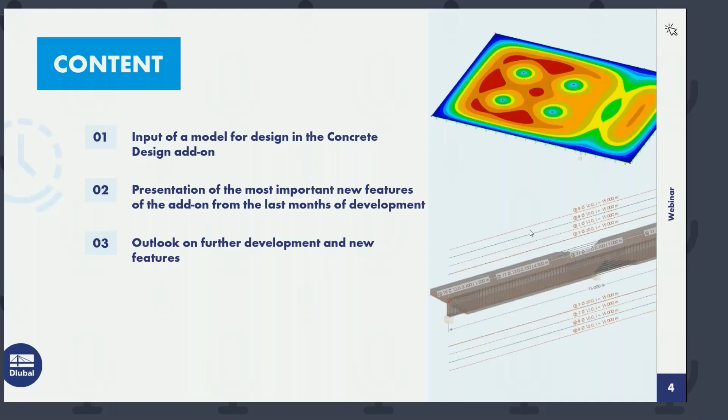Okay, thanks Andreas for the introduction. I will start with a short overview about the content of today's presentation. As I already mentioned, I will show you new features in our concrete design add-on. I will create a small structure in RFEM 6, and during the modeling process, I will tell you about all the new features we now have in our concrete design add-on. Here's a short overview of these new features.

Mainly it's the automatic function for surface reinforcement. Then we have a new function regarding determination of required reinforcement for members, which now also includes the serviceability limit state design. I will show you how to design with member representatives. We also have a new multi-edit option in the edit member dialog for members and member sets. If we have entered a reinforcement and have a certain reinforcement layout inside our member, we now have a new function for printing graphics of this reinforcement template or proposal into the printout report. I will show this to you as well. And I will show you how to activate the design check for the shear joint in the add-on.

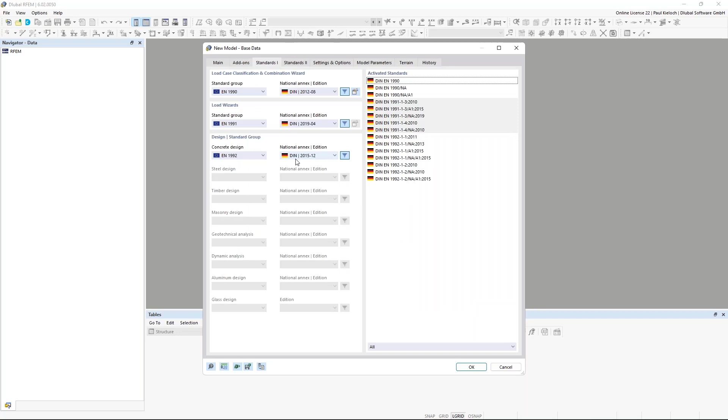As I mentioned before, I will start with creating a new model. I'm opening a new model file, and what I would like to do today is start with a template. That has the benefit that there are some settings already stored in the template, and add-ons can be activated, or I could predefine some national annexes and so on. This is already set in this template, and I'll give it the name webinar, English, so that's the English one. And I'll start this file here.

As mentioned, due to the fact that I've used these templates, I have a certain amount of materials, sections, thicknesses and so on, and I will use them today for this presentation.

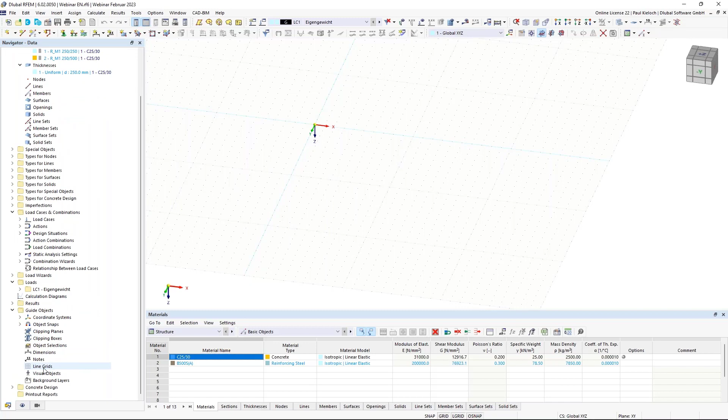So first, I'm switching here to these guide objects, and there I will create a new line grid. I will also show you today the labels and the dimensions.

Switch over here and enter the dimensions in X direction: 5 meters and 4 spans. So it looks like this.

And in Y direction, the first span with 5 meters, then 2.5 meters and 2 spans, and the last one is again 5 meters. So this is my line grid, which I would like to use today.

It looks like this. On this line grid I will create my slab, beams, columns and so on. I can switch off the grid in the background, so it's a little cleaner if you just see the line grids.

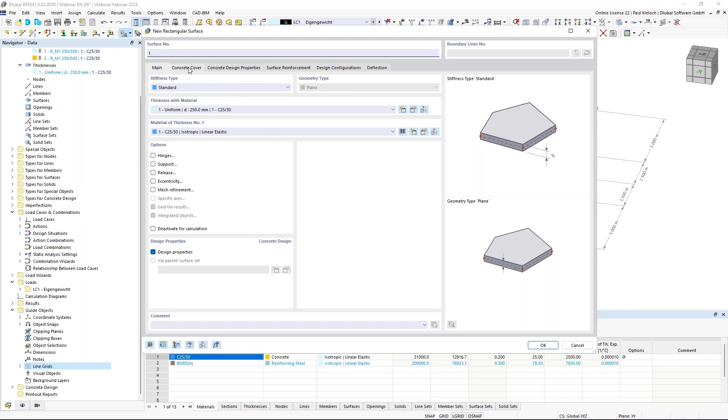The first topic is entering a surface for design. I'm creating a concrete surface with a thickness of 250 millimeters using this concrete. Before entering this surface, I can directly set the design properties for this slab. The concrete cover and the concrete durability class I leave as default in this example, XC1.

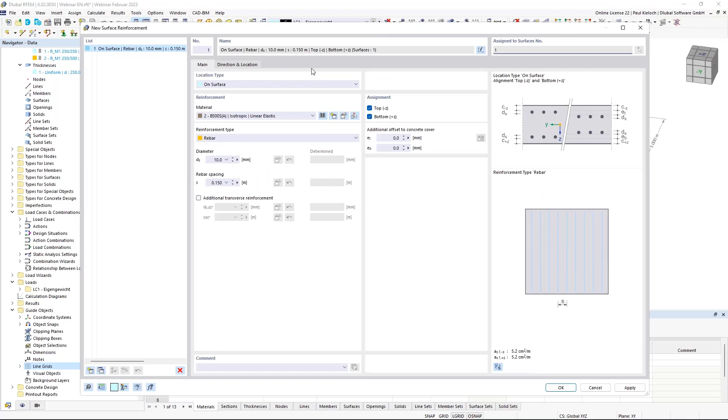The reinforcement direction is also default, and I will assign a basic reinforcement for the whole slab with a diameter of 10 millimeters and a spacing of 15 centimeters in both directions.

You see here already some changes in this dialog, and I will come back to these changes and modifications of this dialog in this latest version of RFEM 6 later, after the first calculation. Okay, I can confirm this.

The design configurations I leave also by default for this first attempt, and I will come back later to these design configurations.

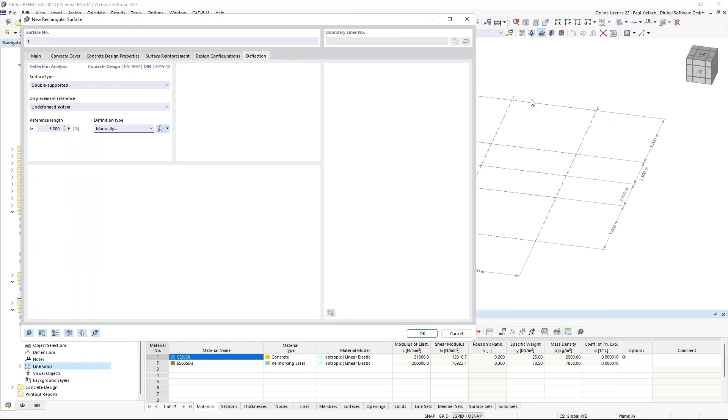The last thing I'm changing here is the reference length for the deflection analysis. So I switch this to manual, and the reference length is now set to 5 meters in X and Y direction. Confirm this, OK, and then I create my slab.

By default, you see the rendering of the assigned reinforcement mesh. And what's new now in RFEM's latest version is the description of the assigned reinforcement.

In the latest version we changed it a little bit. In previous versions there was a small arrow downwards and upwards - if the arrow was downward it was the reinforcement on the bottom side, and if upward, on the top side of the slab. Now it's just a small line next to the text on the downside or upper side. So it's a small change.

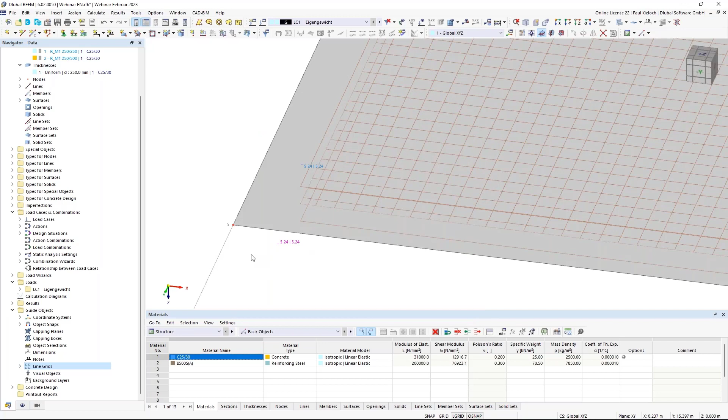What I would like to change here is the number of decimal places for this example. Now I'm switching off this reinforcement display just to have a cleaner look at the structure.

The next topic is that I would like to enter a beam, or rib member, in this axis D. I create a new member, switch the type to rib, and assign this eccentric cross-section on the positive Z side of the surface - that's the default setting. The section used should be this 250 by 500 millimeter section. I can confirm that.

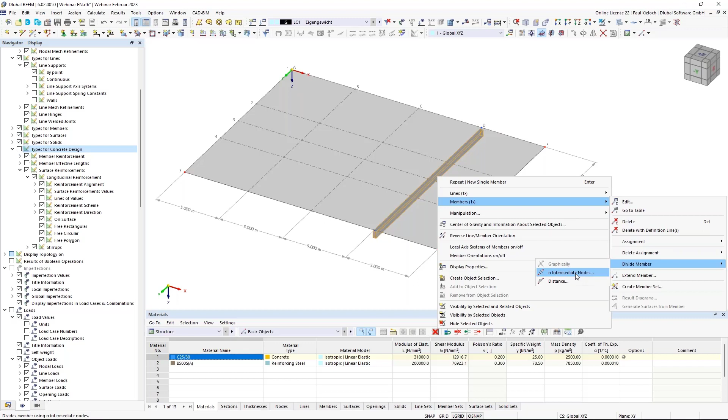Then I will assign this rib in this axis. And in this axis 3, in the point in the middle of the beam, I would like to support this beam with a column, so I'm dividing this member with one internal node.

But what's new in RFEM 6 is that we can use this node type 'on member', which has the benefit that our member is not divided into two parts, making it easier for definition of reinforcement and so on. So I will create a new node with the type on member, without dividing the member.

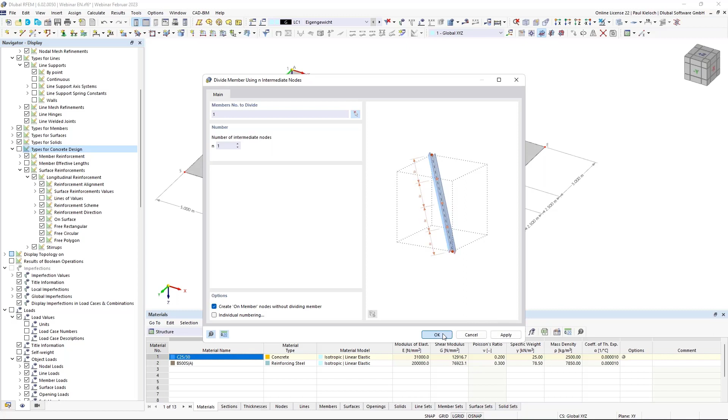You see here in the middle of the beam a light blue node, which is the new type for dividing members. The next step I would like to do is enter nodes for the column heads, so they are placed here at these points.

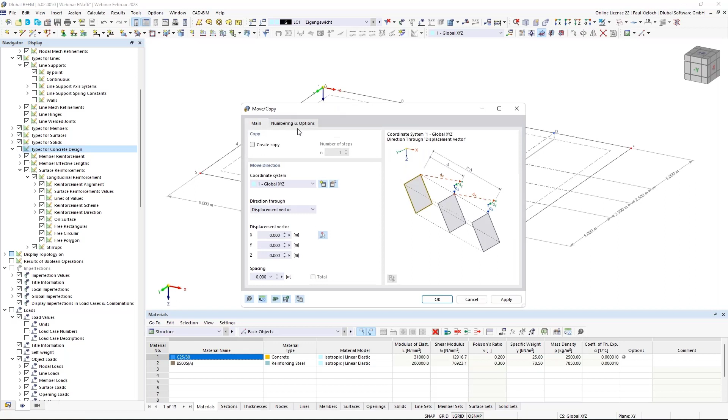Okay, now I'm switching to the wireframe display mode, and I can select these 5 nodes here, and then I will copy them with 3 meters in Z direction. I can link these steps and enter automatically a new member, so I will create a template.

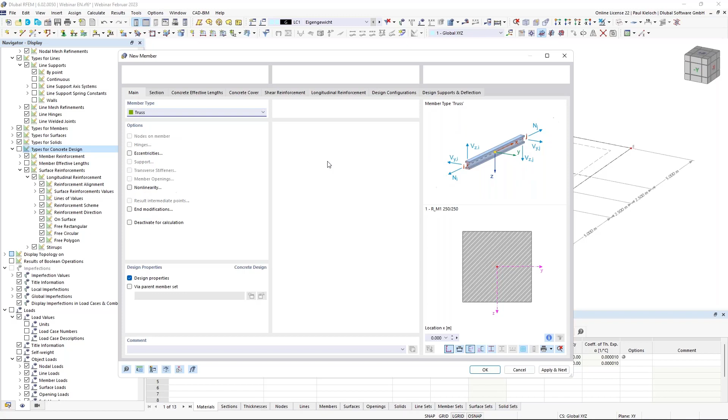The columns should be hinged at the top end and bottom end, so I'm switching the member type to truss. The section is pre-selected in this case, 250 by 250 millimeters, and I can go through all the design properties, entering the buckling lengths for the stability analysis. In my example it's a braced system, and I would like to use effective length factors of 1 in both directions.

Next step would be the concrete covering - I leave it here as it is in this example. Regarding the shear force, I would like to use shear links with a thickness or diameter of 10 millimeters and a spacing of 15 centimeters. The longitudinal reinforcement should be uniform surrounding, 4 rebars with a diameter of 20 millimeters.

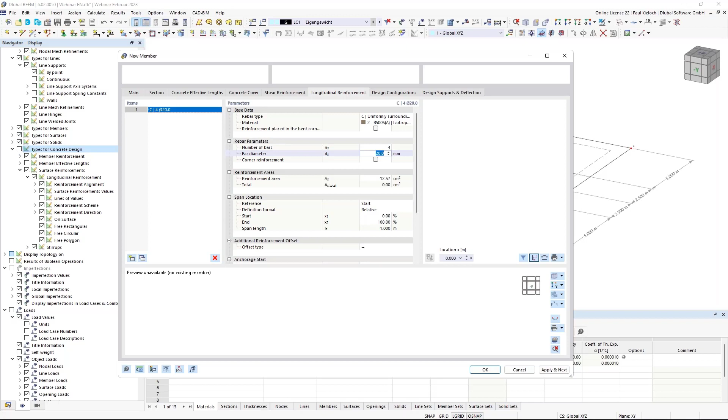Design configuration and design supports are not required to change in this case, so I can confirm this. And then I'm using the template to create my columns, and they would look like this.

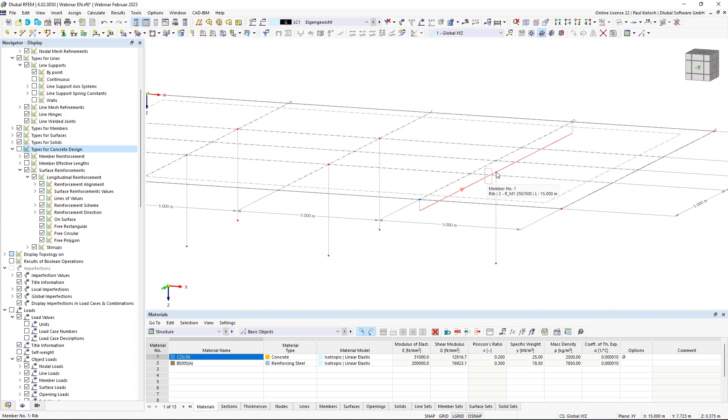I just have to take care because this node is here in the center of this eccentric beam, so the nodes at the bottom end are not at the same height. I will just do a double click on this node and switch this to 3 meters, and then we have the same level here.

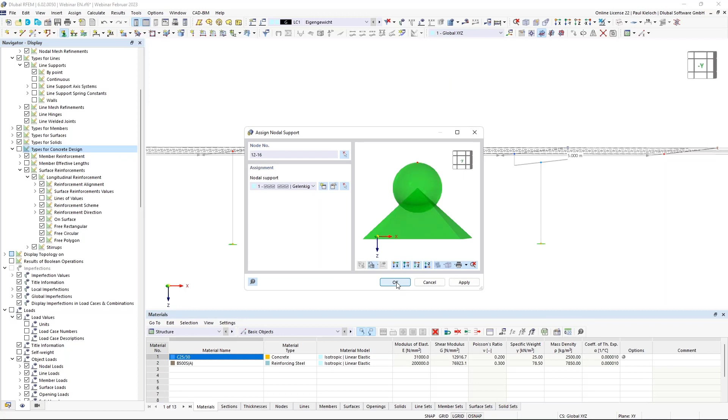Then I can create the supports for these columns, due to the fact that I have hinged member ends by this member type. I can create a new nodal support, and this is fixed or rigid in all directions. That would look like this in this example.

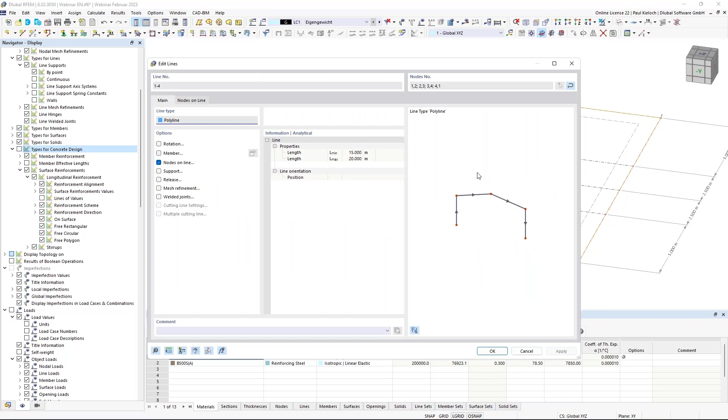Then the next topic would be entering the support at the edge of the slab, so there I would like to consider walls. We have also an option in RFEM 6 for this - I can select all the lines at the edge of the slab, opening them with a double click, and I will assign a support there, creating a new one for them, and this one will be changed to local.

As soon as I switch this to local, I'm getting a new option, stiffness via fictive wall, and the wall thickness should be 25 centimeters and a height of 3 meters, and it is hinged at the wall head and base. So that's okay for me.

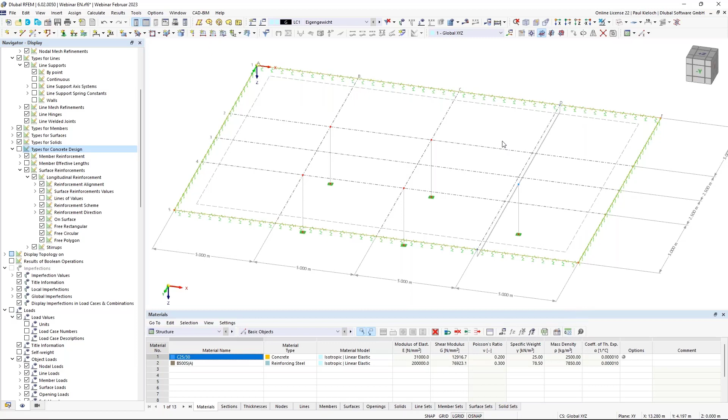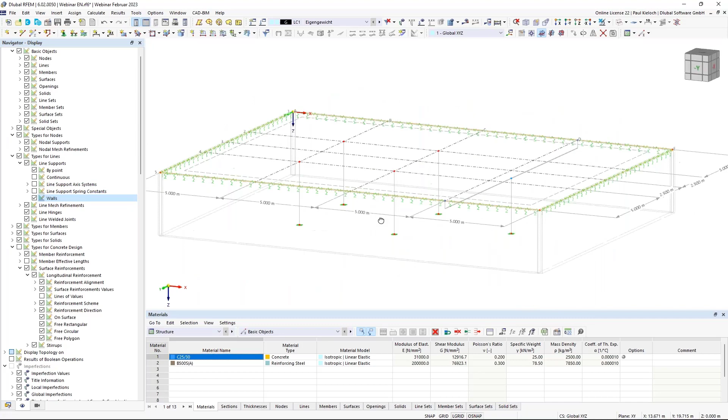I can confirm this, and then I have also the lines on the edge of the slab supported. If I would like to check this graphically in my system, I can switch to the view or display navigator, and there under line supports I have the option to activate the walls, and then I would see the system with these fictive walls here.

Okay, that is basically my system now. What I have not defined yet is the settings regarding the rib.

Therefore, I'm opening the rib member once again, and I switch to this tab here with the rib. In this table you can basically assign the segment lengths for the determination of the effective width for the ribs. I will not go too much into detail for this part - we have shown this in our first webinar regarding concrete design in November 2021, and it's also part of the Eurocode 2 training where we get more into detail regarding this table.

I will just enter the values here to have a realistic effective width for this example. I'm using this approach according to Eurocode 2, so I'm setting the segments here, user defined - it's the same on the other side.

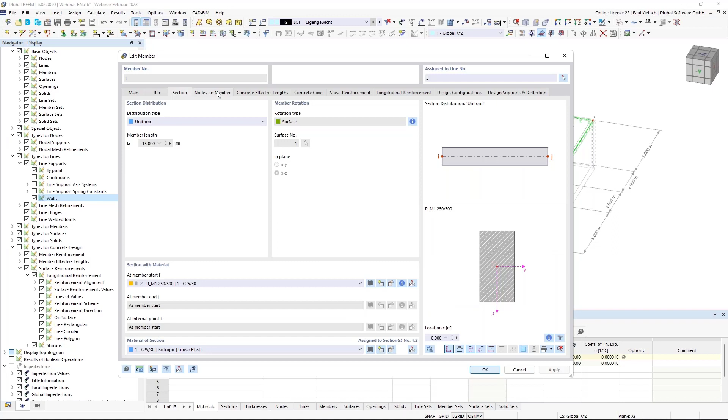So next is the section tab. There I do not have to do any changes, this is okay so far. Concrete covering also, so I can directly switch to the shear reinforcement.

I would like to use shear links, stirrups with a diameter of 10 millimeters and a spacing of 0.15 meters. And I will not use this for the whole length of the member, but I would like to have a span in the middle of the beam where I have 10 centimeter spacing between the stirrups.

So therefore I'm creating new spans. I first switch here to absolute for the definition of the span length.

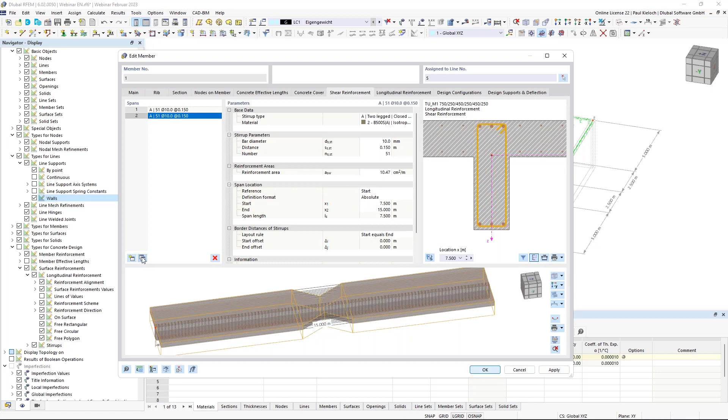Then I just click two times on this button, and then I'm getting here these spans. If I zoom in a little bit, you see that this middle span is now a little bit displaced and not in the middle of the member.

And I can change this here to 6 meters, and in the second X location to 9 meters in my example. And then the span is in the middle of the beam.

And I can change this to 0.1 meters, or 10 centimeter spacing. Okay, that's my shear reinforcement I would like to use today.

And then I'm switching to the longitudinal reinforcement. By default, the reinforcement is using here 3 rebars at the top side and on the bottom side. I will change it to 4 rebars.

And then you find also here the rebars from the surface reinforcement, which is automatically also assigned to the flanges of the rib member.

If you do not want to assign this surface reinforcement here, then you can switch it off via this button, but I will leave it on here for this example.

Last thing I would like to add here is an additional reinforcement on the sides of the web. So therefore I'm creating a new item.

You can click on this button here, and then you get a new dialog called reinforcement layout.

And in this dialog, we have a new button, a new function, and there you can print the graphic directly into, for example, a printout report, a 3D PDF, or a graphic as a file.

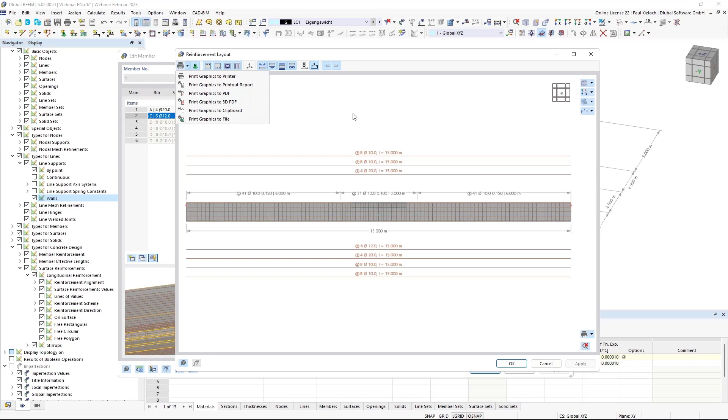So it's not a CAD file, it's a picture file. You have this option, basically the same as for printing a regular graphic into the printout report. So that's also a new feature in the add-on.

Okay, then I'm switching to the tab with the design configurations. There we have the ultimate configuration and the serviceability configuration. In both configurations, we have now new features, one new feature in every configuration.

If I'm switching to the ultimate configuration, then you can see here this shear joint, which is what I had activated before in the tab with the rib.

So in general, there is always the shear joint design check activated, and there you find further settings, for example how the program determines the shear stress in the joint.

Or you can also activate here design of flange connection on segmented cross section. So if you would like to perform these design checks, you can check it on here in this ultimate configuration.

So just keep in mind, this is always active, but you also have to take care whether you have activated the shear joint in the individual members.

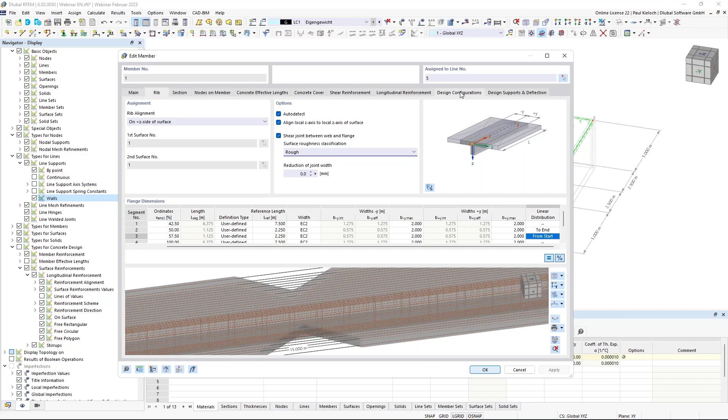The next new feature is inside the serviceability configuration. So inside the serviceability configuration for the members, you find here a new option: determination of longitudinal reinforcement for members.

We implemented this at the end of last year, and now it's possible, if you check this option on, to consider also the parts from serviceability limit state in the result diagrams for the required reinforcement. In older versions of RFEM 6, only the ultimate limit state was considered in the diagrams for the required reinforcement. By activating this option, the diagram will also consider the parts from the serviceability limit state.

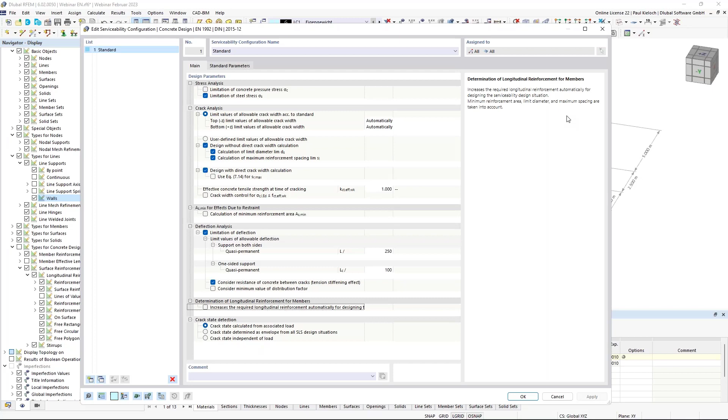If you click on this here, you get a little tooltip. There you see that currently this option considers the requirement for the minimum longitudinal reinforcement, the design check for the limit diameter, or the maximum spacing. So the direct crack width calculation is currently not implemented.

Okay, that's so far regarding the new features in the configurations. One last topic I have to enter here is the design supports.

In concrete design, we are checking the deflection in Z direction, so I'm switching here over the local Z axis. And if I zoom out a little bit, you see that the member length is 15 meters. So this dialog basically does not know that we have a column in the middle of the member. The reference length would be by default the total member length, and for the deflection analysis that would not be okay in this case.

So I have to enter design supports to consider this correctly. I'm creating a new one, monolithical, with a width of 250 millimeters in my example. That will be assigned at the start and the end of the beam, and then we have also one here in the middle. That is an inner support, also 250.

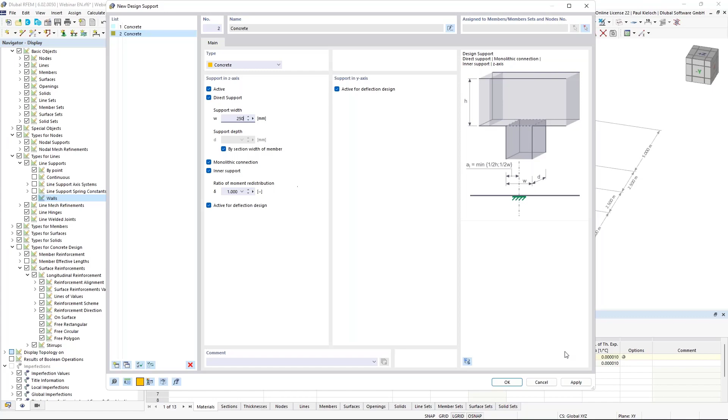As soon as I have assigned these design supports to this internal node here, then you see that we have two spans here, each with 7.5 meters.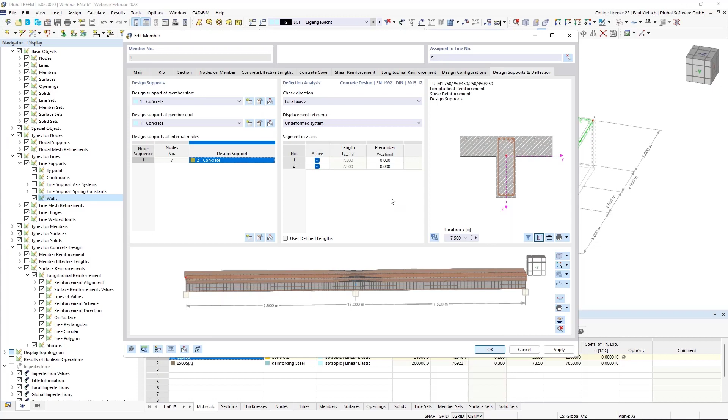We have defined our reinforcement for the member. And the next topic I would like to enter here with the structure is a FE mesh refinement.

I would like to assign the FE mesh refinement on these nodes. So I'm selecting them, double clicking FE mesh refinement, and I create a new one that should be rectangle in my case, and I'm using an inner length of 7.5 centimeters.

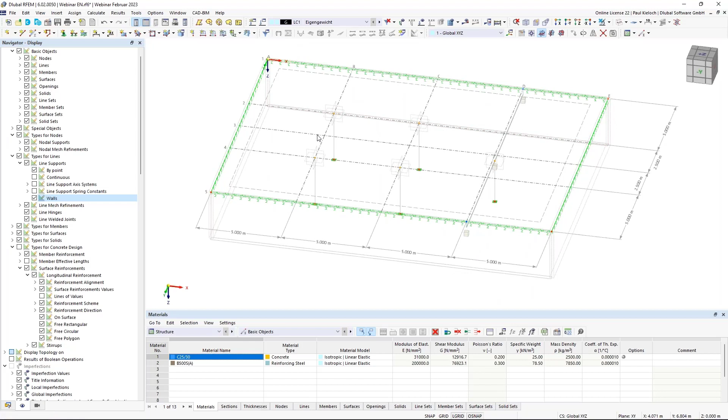Okay, so it looks like this, and now that I have assigned a mesh refinement, I can also use in this situation a surface result adjustment to use average values of the surface internal forces. Therefore, I'm going to the special objects here, and there you find the surface result adjustments.

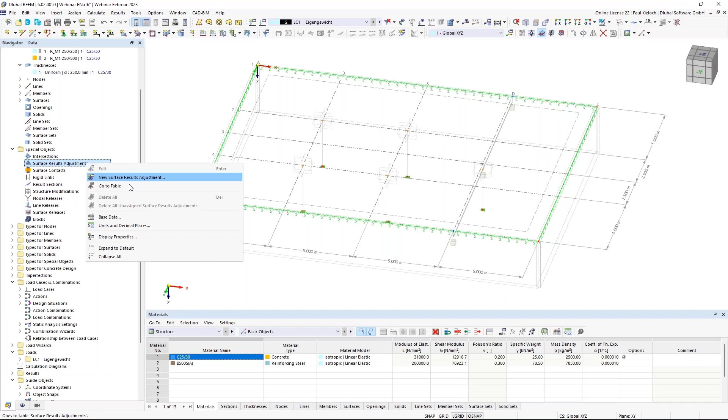So I create a new one for surface 1. I will use dimensions in A and B direction with 0.75 meters in both directions. And with this button, I can set the first location.

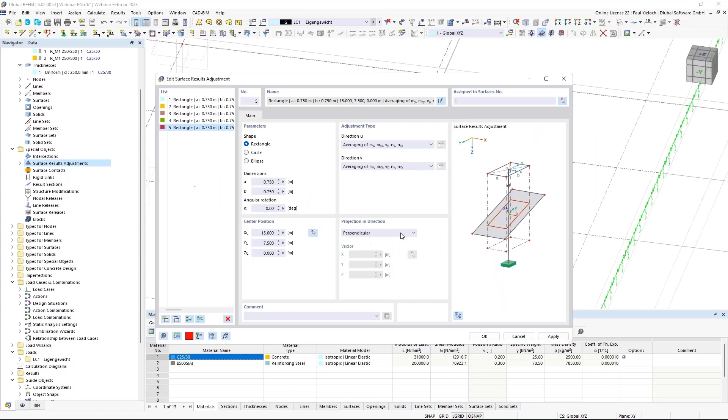And then if I click on apply, I can show you where this is located now. I'm just using this button here for copying this assigned surface result adjustment, and then it's pretty easy to create them, just clicking on copy and switching the location. It goes like this.

And if I click on apply, then you see them here in my file. The next step would be to enter the loading. But before doing this, I just want to check whether my structure is correctly entered, whether there is maybe some problem regarding the mesh and so on.

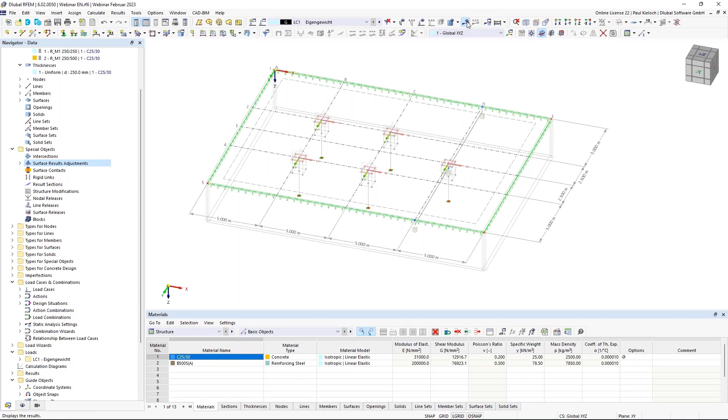Therefore, I would just calculate the first load case here. And yeah, that looks okay, everything seems to be connected properly. Now I can also show you, if I switch here to the internal forces of the surfaces, how the surface result adjustments are working here. Yeah, so everything seems to work.

Now I can switch off the results and the FE mesh, and I can also switch off the surface result adjustments that are here, the result objects. I'm also switching off here the type for nodes, the nodal mesh refinements, and then I have a cleaner look on the file.

Now I can start with entering the load. At first, I need some new load cases for this situation. So my first load case will be the load case for the self-weight, I will call it just DL for dead load. And then I will create a new one here, live load 1, maybe, and I'm using this category.

And I'm copying this, and then this one is live load 2, this one is live load 3, and this one is 4. Okay, apply.

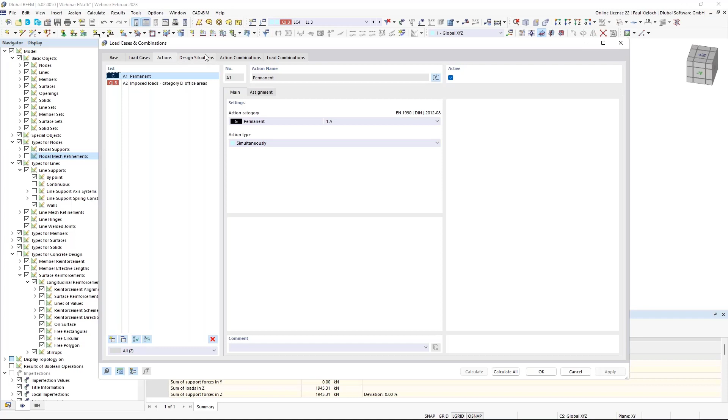The actions are okay in this example. I'm switching to the design situations. The design situation serviceability limit state frequent is not required here in my example, so I can delete this one, and I will do the design checks just with the characteristic and the quasi-permanent design situations.

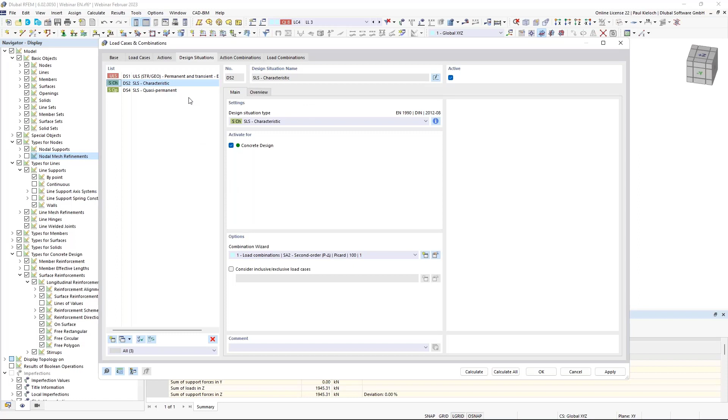One change is that I will create load combinations according to first order analysis. So I'm switching that here and switching to the action combinations. And then if I click on this tab, I will get the load combinations, and they are all according to first order analysis. Okay, those are my load combinations for this example.

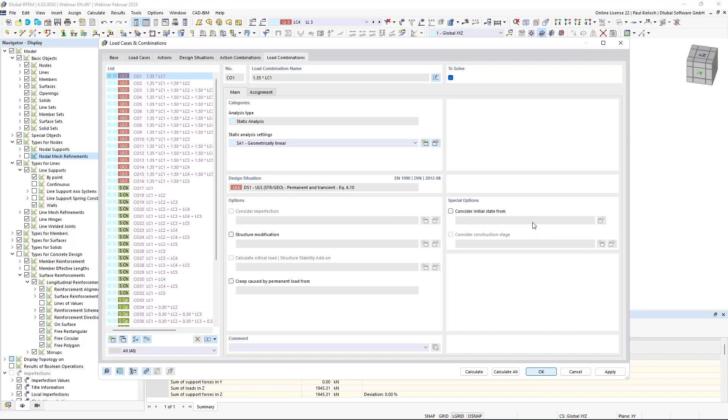Now I can start filling these load cases with loads. So the first load case, dead load, will have 1.5 kilonewton per square meter on surface number 1, and it looks like this.

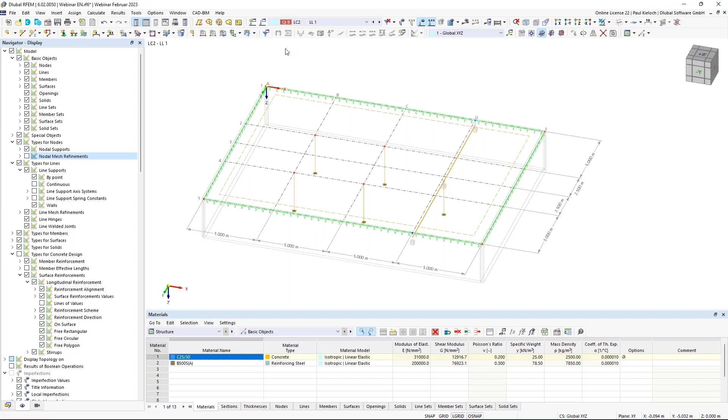Here in the second load case, it's now a little bit more problematic. For the live load, I would like to use a loading pattern according to this grid, these fields here. Currently, we do not have a load wizard for this, so I will create the loading pattern by using free surface loads, rectangular loads, and polygon loads.

For this situation, I'm in my load case 2, and I will create a rectangular load on surface number 1. The load value here is 3.8 kilonewton per square meter, and the location is from that point to that point. I can click apply next, and then I see the load in this field.

Now I'm just entering the surface and switching the location once again. Looks like this, apply next. On this point. And okay, so in this situation and in this situation, it's a little bit more complicated, so I cannot use the rectangle.

I will use the polygon load here. It's also assigned to surface number 1. And then from this point to that one, and that one, confirm is okay. The load value is also 3.8.

Okay, and then I need this function once again. Now from here to these nodes, okay. And it looks like this. So now I switch to the next load case.

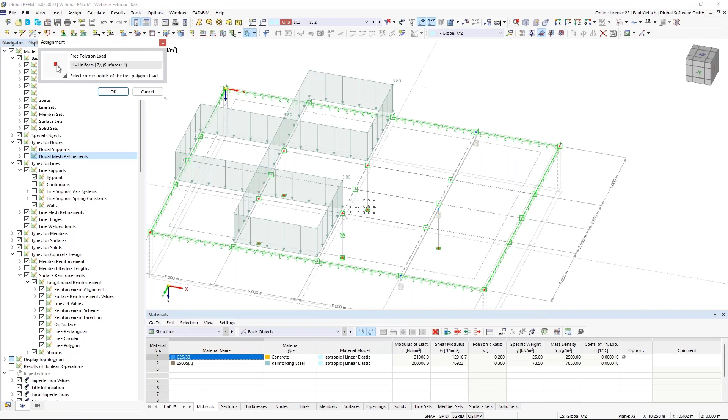I'm starting once again with the rectangle, 3.8, here, apply next. Here, apply next. Here, and okay. And then I'm switching to this polygon load here, from that point to that and that point. Okay, 3.8. Okay.

For the live load 3, I'm using the rectangle again, surface number 1, 3.8 kilonewton per square meter, and it's from here to here. Then I can click apply next, and then I can switch here the load case in this dialog, assign it to surface number 1 again, and switch the nodes. And then it would look like this.

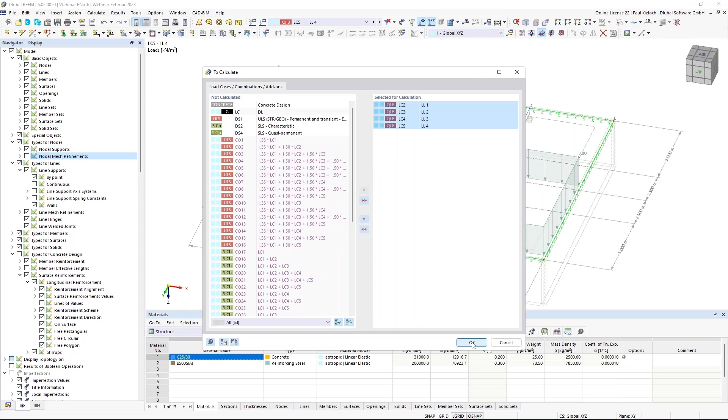If I'm entering these loads like this, then I'm always starting a short calculation progress. I'm going to calculate, just selecting the load cases where I have assigned these loads. Start the calculation.

Now what I'm always doing here is switching on the load distribution in RFEM. I'm switching off the load itself, just the 2D elements. So now I can switch to all load cases and just check whether the loads were applied correctly. So I have here my 3.8 kilonewton per square meter, so I can directly control the loading pattern. Okay, that looks okay so far.

So we have entered our combinations and also our loading. And now I can basically start with the first calculation in the concrete design add-on.

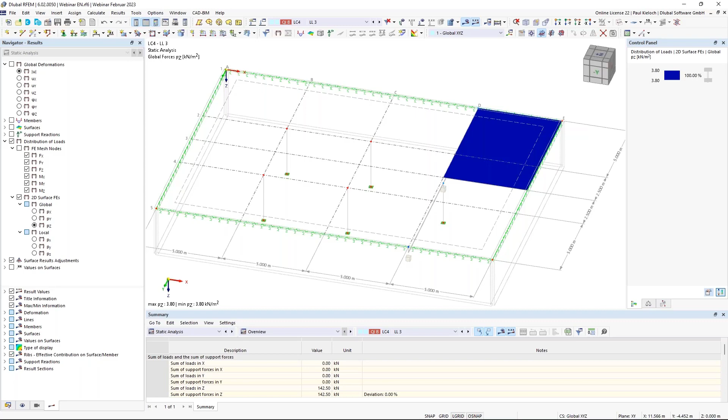Therefore, I'm switching here in the table to the add-on concrete design. By default, all objects are activated here, but I will do the first attempt just for surface number 1. And then I'm starting the calculation.

It takes a moment, and then the program will show us the design checks for surface number 1, and we can check the design ratios at first for the ultimate limit state. And then we can check where we have to enter additional reinforcement.

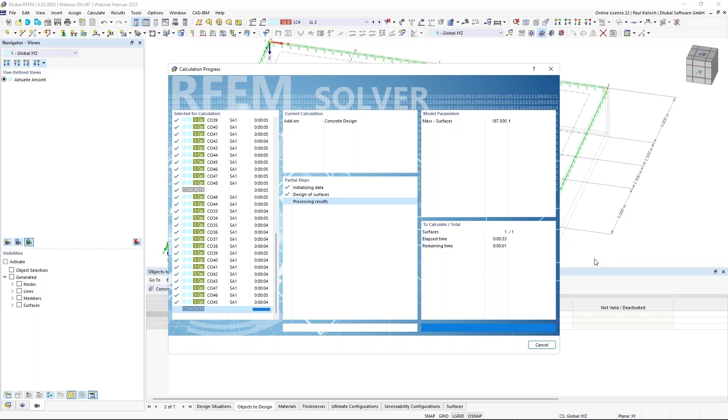Okay, so basically if you do surface design, this dialog will in most cases look like this or similar. So you have several points where it's not designable, or you have not designable nodes. Therefore, I would switch over here to this design checks on surfaces.

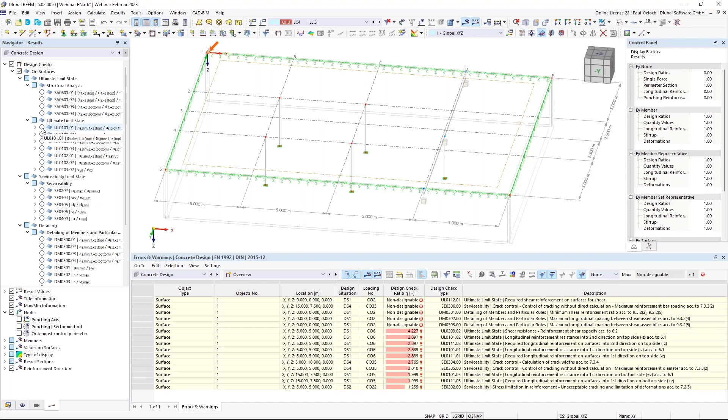In my case, I would like to check it, for example, for the top side in direction 1. And then it looks like this, that especially over the columns, I have elements where my design checks are not fulfilled. Here you see it's a range from 1 to almost 3 times not fulfilled design checks. That's the same also in the other direction. On the bottom side, it looks a little bit better, but there's also a small problem here in this area.

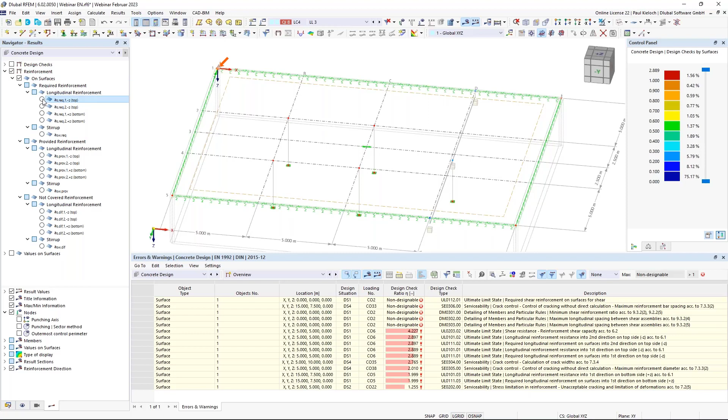So if I have this result diagram in this way, then I can also switch to the reinforcement. On the reinforcement, I can switch on the required longitudinal reinforcement on the top side. And then I see these values here.

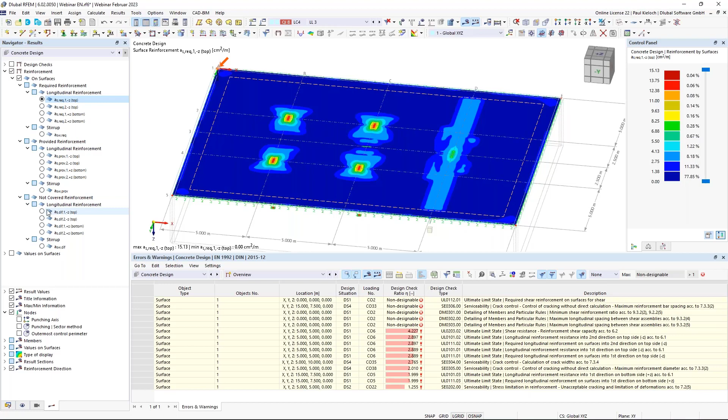One more informative graphic would maybe be switching over to not covered reinforcement. So we have assigned here a basic reinforcement of 5.24 square centimeters per meter, and now it would be interesting where I have to assign additional reinforcement, and therefore I'm switching over to this not covered reinforcement. That is, like I said before, basically over the columns, and here in the middle of the beam there's also one area where I would need additional reinforcement.

Now if I'm entering additional reinforcements, there we have a new feature, and therefore I'm switching here in the data navigator to the types for concrete design, surface reinforcement, and I create a new surface reinforcement. This new surface reinforcement will be also assigned to surface number 1, but now not on the total surface, but it will be changed here in my case to a free rectangular location type.

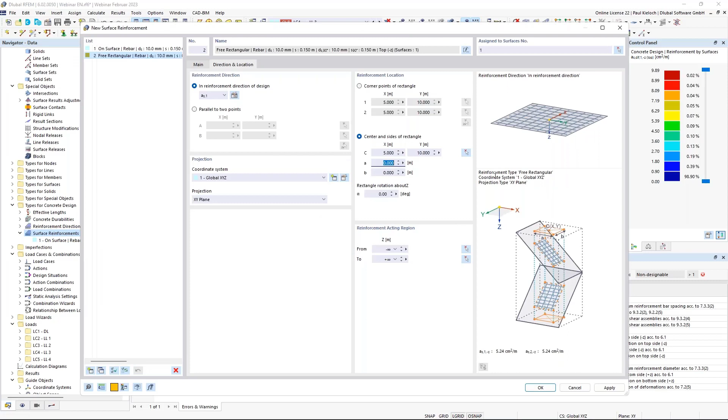The first additional reinforcement, I will assign just on the top side, and I will enter here an additional offset of 20 millimeters. I will use this additional reinforcement in both directions, and the location will be here, for example, on this point. The dimensions are 2 by 2 meters. And just clicking here on apply.

No, not yet. So, we'll enter it once again. Millimeters, okay. On this point, and 2 by 2 meters, okay.

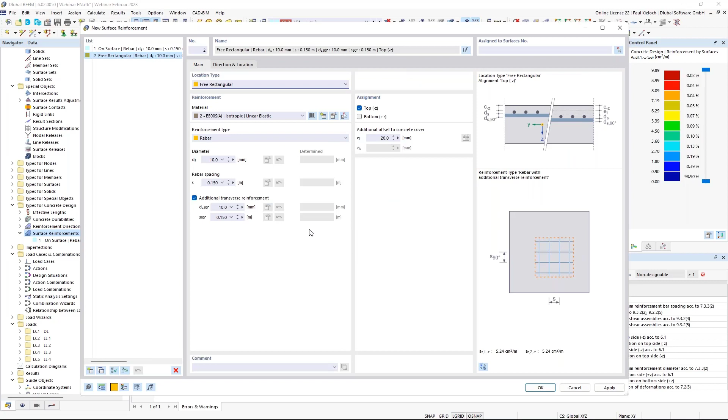So as I said before, there is now a new option here regarding determined and buttons to overtake a determined value. These buttons are required for a new function in RFEM 6. You can find this new function if you click here on this button, once in the diameter, it's called auto, and also in the spacing.

So what you can do here now is you can assign an additional reinforcement, which is covering automatically the not covered reinforcement from the first calculation. In my case, I'm needing here an additional reinforcement of around 10 square centimeters per meter, and I can say that I would like to use rebars in both directions with 12 millimeters. The spacing between the rebars should be determined automatically.

So if I'm selecting auto, then the program shows me these additional parameters, and there's the minimum spacing and maximum spacing defined here. So I will use 10 centimeters as minimum and 30 as maximum, confirming this with OK. It's the same in this other direction. OK, I click on apply.

So the next is that I'm copying this one here. Copy, and I just change the location. That is basically the same like I have done it before with the surface result adjustments. This one, and OK. And the last one will be here.

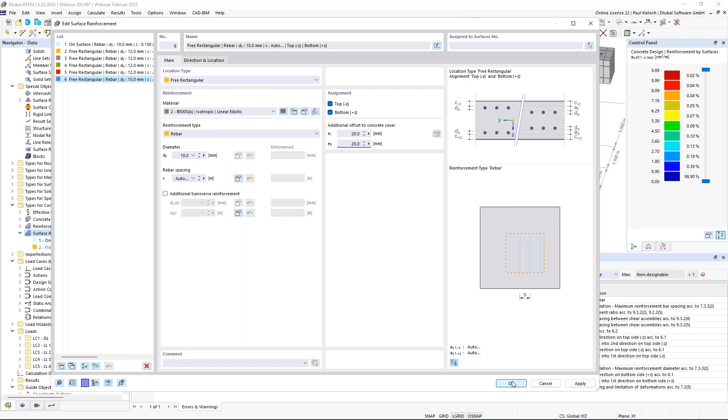Okay, and the last one is just in direction 1. I will use 10 millimeters here, but this time on the top and bottom side, this way. Also auto, okay. I can click on OK, and it looks like this.

So now I have just gone to concrete design. Results, just delete the results here. And now, due to the definition of this slab, due to the definition of this additional reinforcement here, I've just forgotten to assign this to surface number 1.

That was the problem. Okay, now it's assigned, and if I switch them off here, or switch the display setting on, then you see here on these slabs this additional reinforcement. It looks like this, and due to the fact that we now in this state do not know which value there is assigned, we have just the info that it's auto reinforcement. So with these settings, I can start the calculation once again.

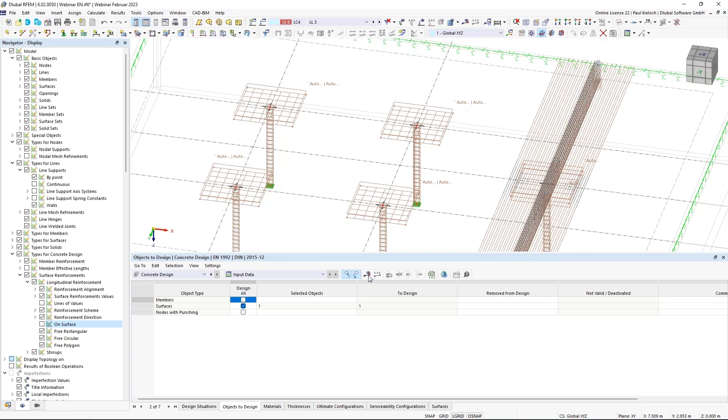And now the program will cover all the not-covered reinforcement automatically, and the result will be that I'm getting info about the spacing I have to use if I assign, for example, a diameter of 12 millimeter or 10 millimeter and so on. Maybe one point I haven't mentioned yet is that you cannot assign the auto function for diameter and spacing at the same time, so that's not possible. You have to use either the automatic function for the diameter or the spacing.

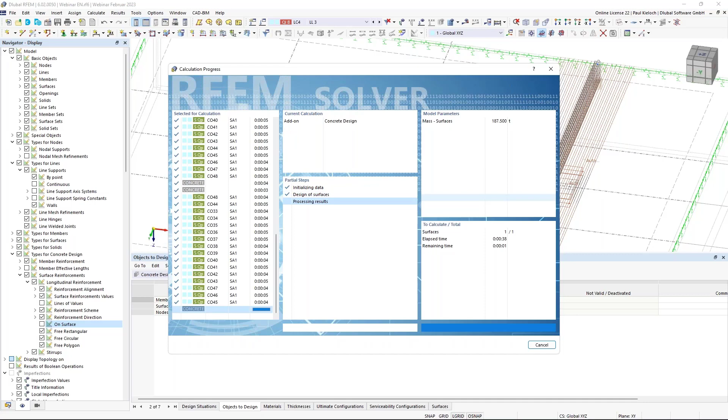Okay, just wait a moment. And now it looks like this. So what you see now is we are still in the results with the not-covered reinforcement. You see now that the not-covered reinforcement is 0 here. If I'm switching over here, there's one small part, 0.7 square centimeters, so I will neglect it for this part. But on the other sides, it's also everything covered.

And now you see here the info with the required or assigned additional reinforcement, so the value in square centimeters per meter. And if you would like to see the spacing, you have one option: you can go to the reinforcement on surfaces and to the tab here in the table, surface reinforcement. And if you click on one item, then this line or item in the table will be highlighted.

And in this case, I see that I have to assign at least additional reinforcement of 12 millimeter and a spacing of 11. So maybe you think that spacing of 11 centimeters is not so practical, so you can also use other values.

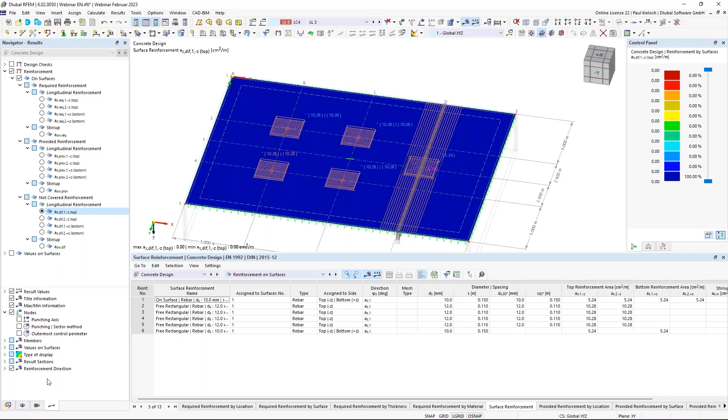So if I'm opening the dialog for edit reinforcement once again, you have now two options basically. One would be that before you start the auto process, you can switch the increment in this additional parameter settings so that you, for example, use just 5 centimeters. That would be an option.

But you can also use this determined value here and overtake it in this cell, and then you can edit it. So I could overtake this value and modify it, for example, to 10 centimeters. That's one option, using this button here.

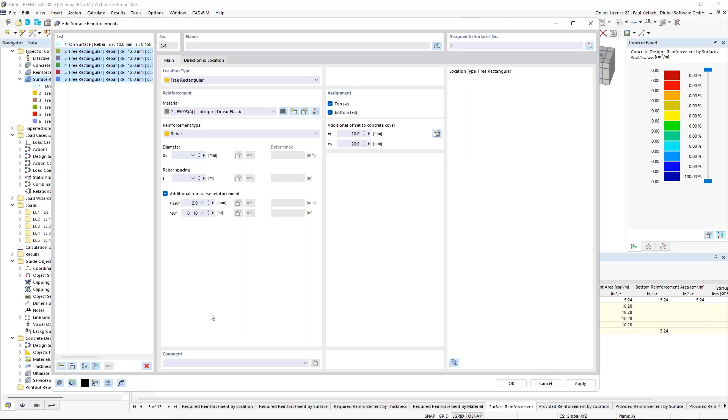It's also possible to select all items here which have this auto setting. And then you can use the same button here at the bottom end, and then the program uses the automatically determined values.

I can assign this one, and I will delete the values just for concrete design. And before I'm starting the next calculation process, I will continue with the columns.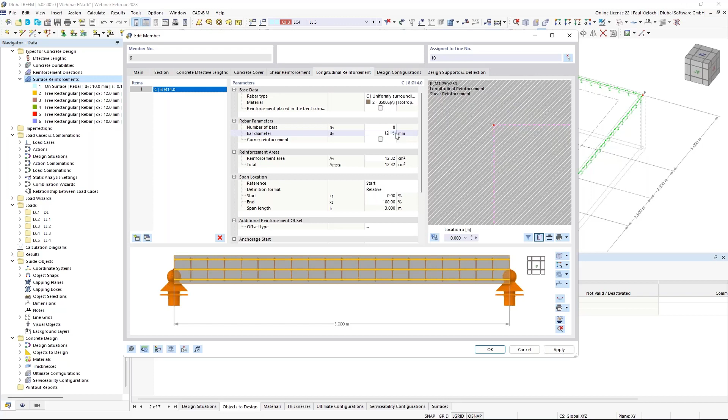So for the columns, I will show you two new features. One would be regarding the multi-edit. In case you have a member with a different type of reinforcement layout - let's say, for example, in this member, I would assign 8 rebars with a diameter of 12 millimeter. It would look like this: here we have our 4 rebars with 14, and here 8 with 12 millimeters.

In the previous versions, we had the limitation that if you had different reinforcement proposals, it was not possible to make changes here in the shear reinforcement and longitudinal reinforcement. That's also solved now, this little downside, because now it's also possible to show members with different settings. So you see, for example, that we have the same rebar type running uniformly, but here we have a different number of bars, from 4 to 8, and also different spacing.

And in this dialogue, there is basically a certain member displayed from the selection. So if you would like to see another member, you can switch here with this option between the members, and then you would see the rendering for the selected member.

What I can now do with this new function is put several different members into one selection and change the reinforcement for all these members in one step. So I would set it back to 4 rebars with 14 millimeters, and then it's the same for both, and I will get also the name or description of the item back, because it's clear the amount of rebars and the diameter.

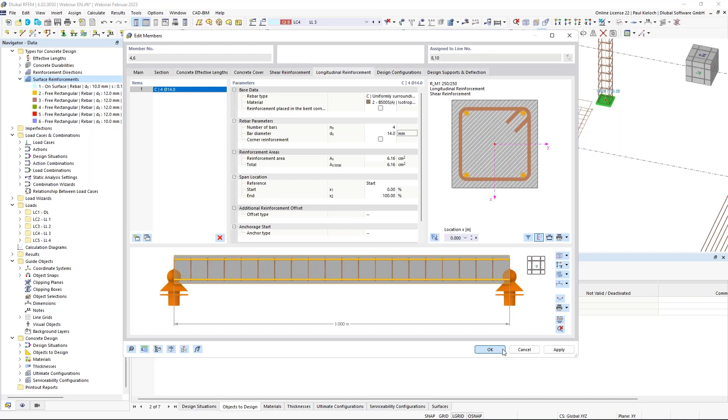That's basically regarding the multi-edit. So you have this multi-edit for the shear reinforcement and also for the longitudinal reinforcement. In my case, it's also the same length, but it's also possible to use this multi-edit if the lengths of the members differ.

So the next feature or option I would like to show you is using member representatives for the design in the concrete design add-on. Therefore, I will create types of columns. Let's say you have a lot of columns in your structure and you would do the calculation with different types. Then you can create, for example, here...

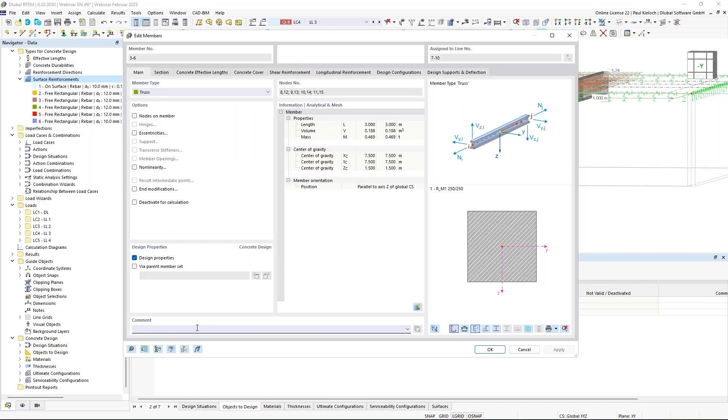Or not create, but enter here a comment. Let's say in my case, type 1 column, type 1, this one. And the other 4, I would add a comment and say type 2, for example.

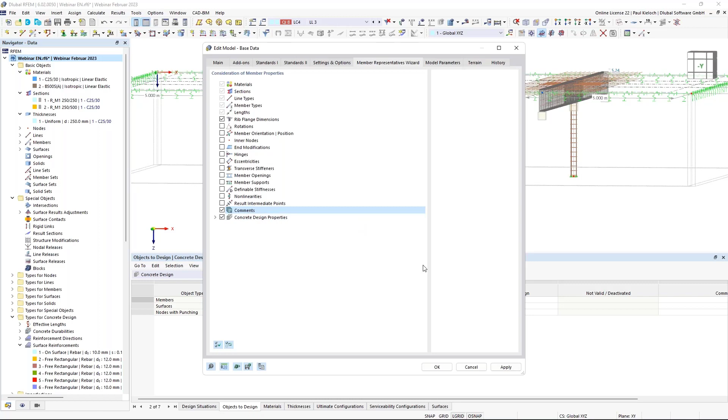So the next step would be to activate the member representatives in the base data dialog here. If you switch or activate this member representative wizard, then you have the option to also consider these comments. I'm activating these comments here, and then if I click on OK, I'm getting these member representatives.

So we have one member representative with the blue bubbles here, and one with the green ones. I can do a double click on it, and directly switch the name in the type 1 column, apply, and this one maybe to type 2. It's not required to change it, but it may help you afterwards in the documentation, because you can create printout reports and tables including the name, making it easier to document the results for the individual types for the column.

So what you now see is that if you are working with these member representatives, you can also assign shear reinforcement, longitudinal reinforcement, and in general set all the design properties by using the member representatives.

I'm confirming this with OK, and now you see in the table with the input data these member representatives. In my example, I would like to do the design just for the type 2 and type 1 column. I will do the design for this member here.

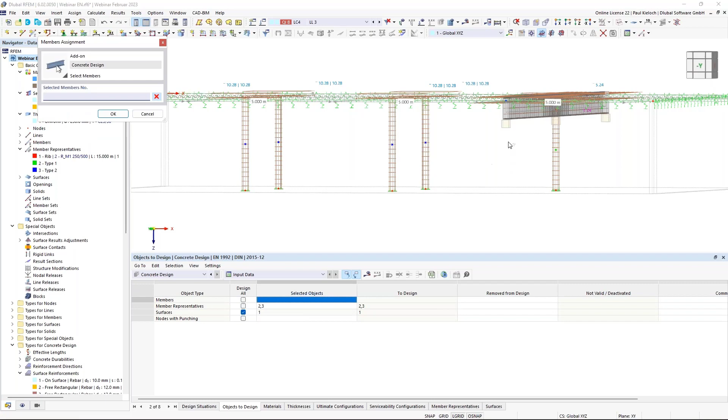And then I will activate all my punching points here in the table, but I have to activate them also here in the structure. So this one, and this one. It's for nodes, and I will activate the punching design check.

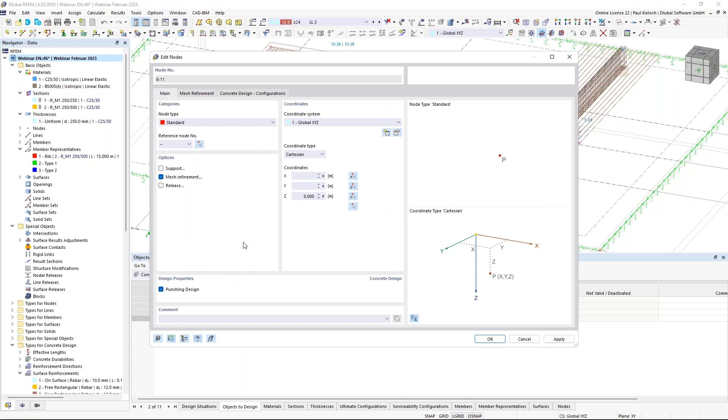And in the configuration for punching, I'm switching on this option that I would like to use the provided longitudinal reinforcement. As I said before, I have used this auto function to create this additional reinforcement, and I will now also use this provided additional longitudinal reinforcement for the determination of the punching shear capacity.

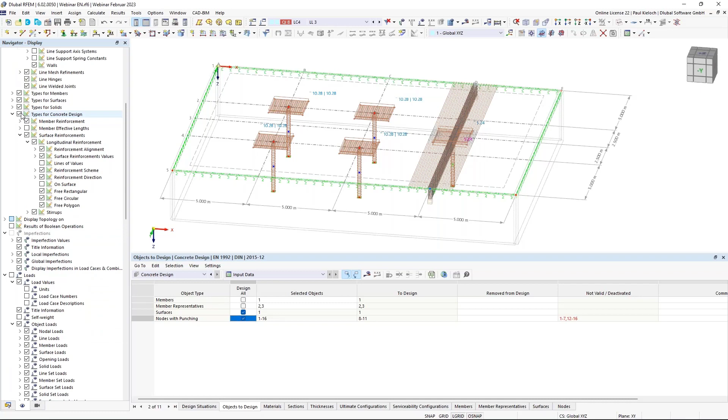That's basically all. I can now just save this file, and then we can start the calculation for the whole structure, but I will switch off the types for concrete design, and then I'm starting the calculation process. In the meantime, I'm switching over to the presentation.

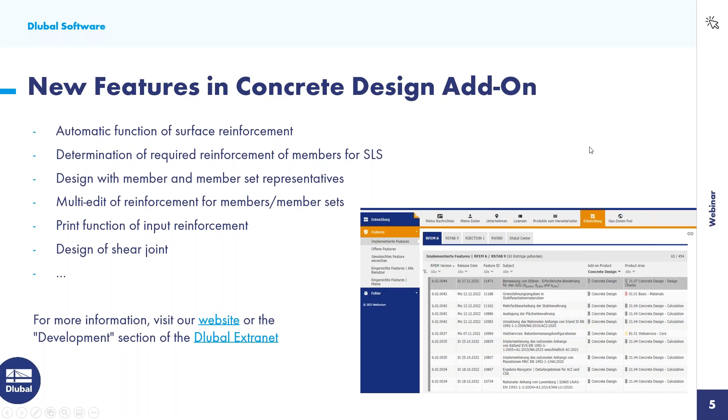So while the program is calculating, I will give you a brief overview about the upcoming new features in our add-on for concrete design in RFEM 6. That is a random list, so it does not mean that the first mentioned feature will be released first. It's just randomly listed.

So the same determination of required reinforcement like I have shown to you for the members, with the option in the SLS configuration, we are also developing the same option for the surfaces. Then nonlinear calculation is also in development for ultimate limit state and serviceability limit state for slabs and members or beams. Then one upcoming feature is also the merge of the shear and the punching shear resistance and reinforcement design checks and reinforcement into one graphic.

Then, of course, fire resistance design checks, seismic design of concrete components according to Eurocode 8. Then we are developing an interface between RSECTION and RFEM 6, to have the option to reinforce general massive cross-sections in RSECTION, not just in terms of longitudinal reinforcement, but also regarding stirrups. So you will be able in future to create free-form stirrups in RSECTION and then import this cross-section to RFEM 6 and do the design check there.

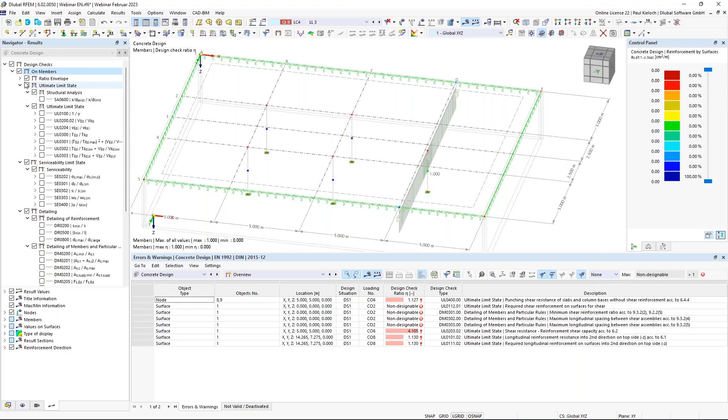Like I said before, it's just a random list, so this list of features is not in context to any release dates. I will switch now over to RFEM, and we can do a quick overview of the results, because there we also have some new features, just one for the members. So I have done the design on the member here.

Just for this demonstration, I've used one member here - this rib member. For example, if I switch over and show you the design check for the shear force, since some version we have extended the amount of intermediate results, so it's a little bit more detailed now than in previous versions.

You have just to click on this small arrow here, and then you get more detailed results. Here you see the results for the new features regarding the shear joint, which are all listed in the design checks for the members.

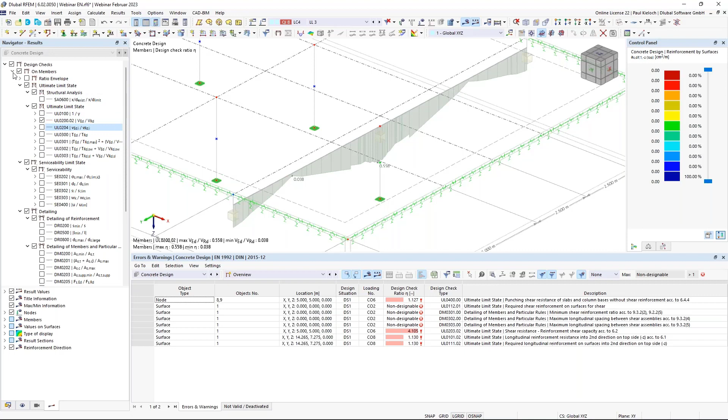Then if I switch over to the member representatives, that's basically the same, but what I'd like to show you is that if you do the design in the add-on with the member representatives, you get the same result for the individual member representative. So I have here 4 columns, and the 4 columns have the same results.

If you would have the individual results for the individual columns, then you can use, as I said before, the representative for input, and you have to design then the individual members, not the member representatives.

Regarding the surfaces, we checked the results before. I'd like to show you one last new feature regarding punching, because in the latest version we now also implemented this load increasing factor beta, which is now also possible to activate in this detailed result. So under the design checks on nodes, you find this load increasing factor beta.

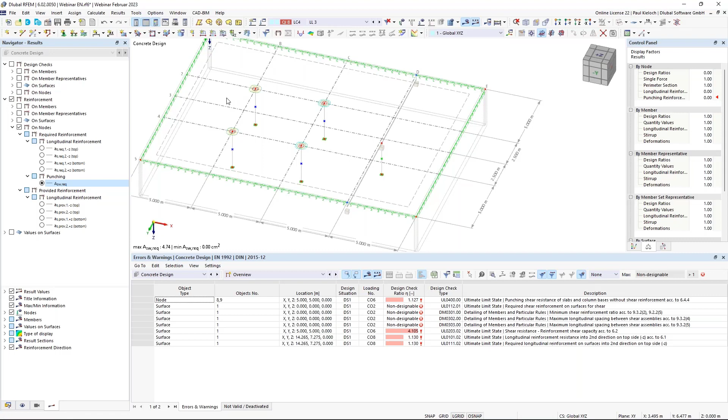If I switch over to the reinforcement, then I'm switching to the reinforcement on nodes. If you have activated the required punching reinforcement here, then you can click on isolines, and by activating values on surfaces, you will get the individual amount of required punching reinforcement in the individual perimeters.

And now, the last feature I'd like to show you: you have here the option in the nodes to also display the outermost control perimeter. That is also a connection to the feature I mentioned before in the presentation - that we plan to combine the results of the design check for shear force in the slab and also punching shear above these columns.

Okay, those are basically the mentioned new features in RFEM 6 and its add-on concrete design. And with that, I would hand over the screen back to Andreas.